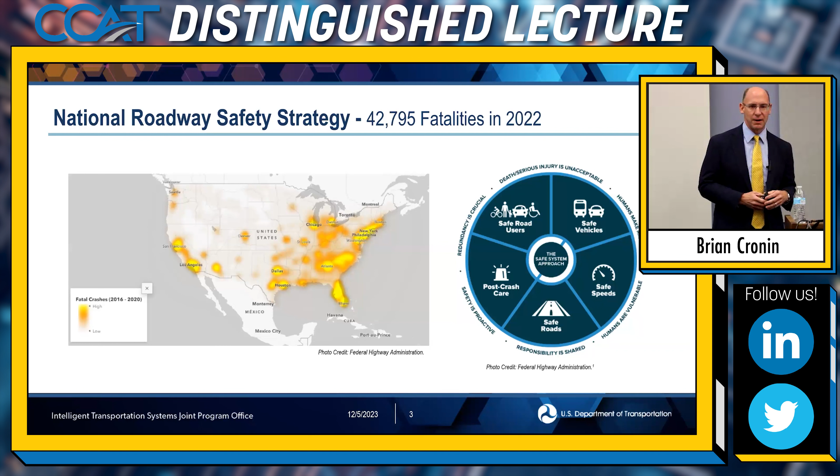So the other side in our strategic planning is innovation and transformation. It's in the department's plan. I pulled out a slide from Federal Highway's strategic plan, and it's really encouraging us to take risks and conduct innovative research and do it collaboratively, work with state and local tribal agencies, work with universities, work with industry to try to push the envelope and create something new. And so that's really what I've focused my career on: doing research leadership and trying something new. And I'm really happy to see in our strategic planning the focus on zero, but also the focus on creativity and innovation and how we go about doing that.

So when we're looking at safety, we have a wealth of data that we want to look at. And one of the things that has been alarming is the increase in vulnerable road user, pedestrian, bicyclist, people on scooters, fatalities. That's gone up 70% in the last several years. And there's been a lot of focus on how does technology, how does roadway design, what are the different approaches we can look at? And we've, as a department, also then looked at what are the situations that lead to it, what are certain states or localities that may have more challenges or opportunities. And so we've been diving into the data in different ways.

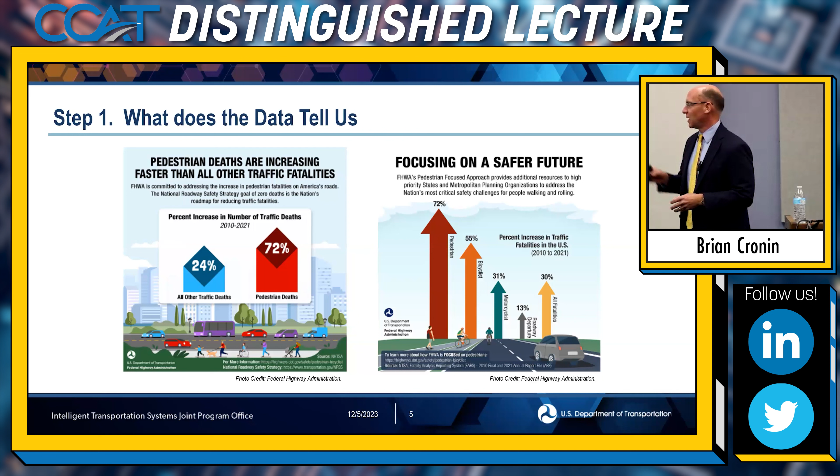And so now, as we think about how we look at that data, and I'll get to it more at the end with artificial intelligence and machine learning, but it's not just the fatality. We now can look at near misses, and we can look at other information, and I'll go through some examples that you wouldn't think about that could inform us in making better safety design choices that are now available to us.

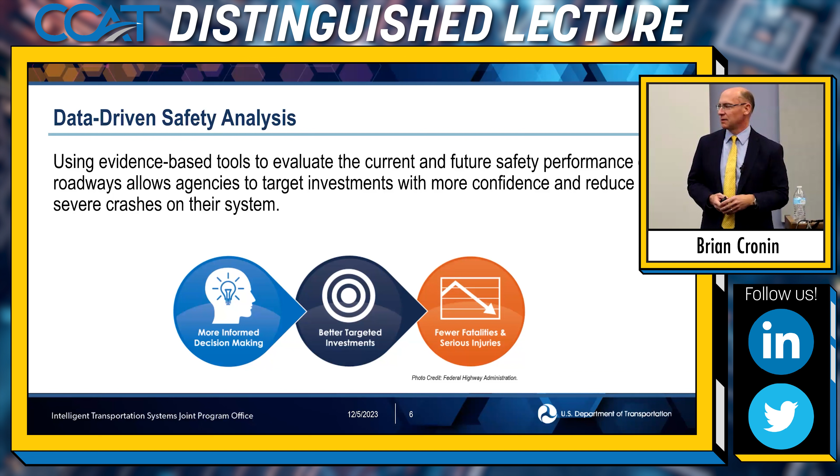So we really want to ask, do we have the tools as an industry to harness that different data? Do we have the access to those data sets? Is there open data? Is it shared? Do we have the space? Do we have the computing power? So we're looking into all of that. And how do we make an informed data-based decision?

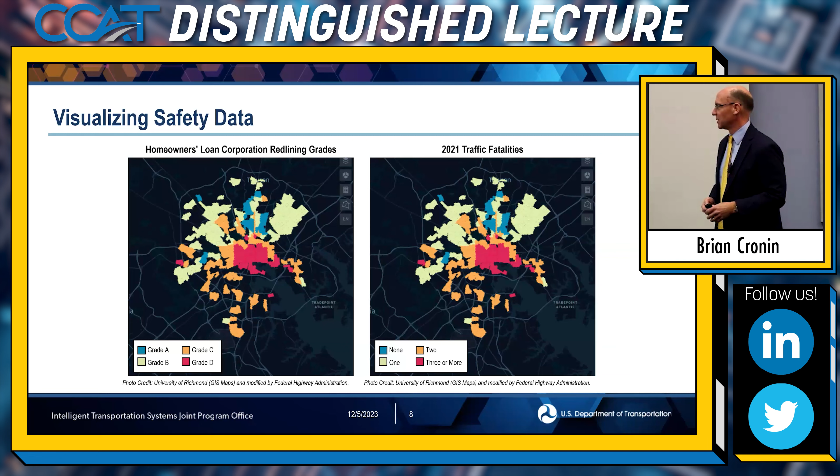So we end up looking at data, and we do our best to assess: what do we do? Where's the problem? What kind of solution might make sense? And then we have to go and design something bold and big and different to create that.

Two of our very successful designs, one longer term and one newer, are diverging diamond interchanges. The premise there is, if you can prevent left turn crossing path scenarios, and design these interchanges to take away that maneuver, you can reduce fatalities.

Federal Highway was working with the state of Missouri a long time ago, and our human factors lab was able to create the first diverging diamond virtually and run a human factors study to see if drivers doing something they've never done before, like crossing on the other side of the road where they might feel uncomfortable, could follow the signage accurately and know what they're supposed to do. So we were able to design in the virtual world a diverging diamond, build it, run tests through it, clarify the signing, and then the state went out and built the first diamond.

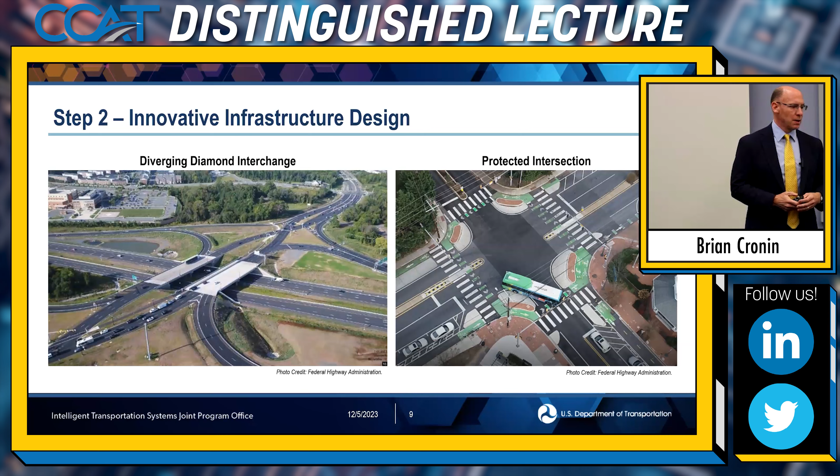If you think about our parks, we want them to be pretty, aesthetically pleasing, to look like they fit in. So you want a stone wall or a timber wall. Well, these were designed 50, 60, 70 years ago. Vehicles are bigger now - that low wall in your F-350, you're probably thinking you're going right over it. So what could we do to create this aesthetically pleasing wall, but not have the cost of a full stone wall? We designed concrete inside, and you're just facing the barrier on the outside.

We were able to work with the Park Service and our Federal Lands Office to create a new design and test it at Turner Fairbank. If you visited DC right now and drove on the GW Parkway, they're installing these new designs all across the parkway, soon to come across our national parks nationwide.

So it's just an interesting way to think about how Federal Highway might partner with the Park Service, thinking about how you keep something for the context that everybody wants. Our parks are beautiful, and we want to think about that and design accordingly.

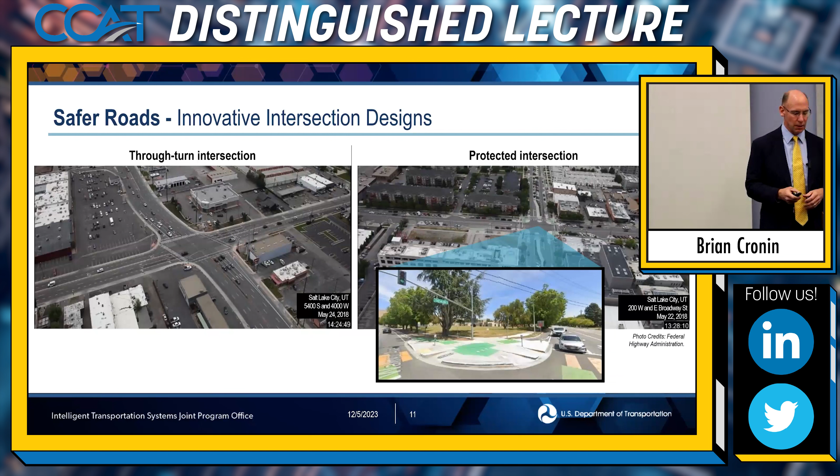Speed is another huge issue in the safe system approach. So we've updated our speed safety camera guidance. You'll see states looking at how you can put a speed camera in a work zone, so a lot of new capabilities. People are thinking about using technology, and what we're trying to convey is we're trying to get you to drive safely and drive at the posted speed limit. The speed limit's reduced because you're at a work zone or near a school or a different scenario, so we're thinking about driver behavior and speed setting, and how we want to enforce that.

We also have to think from an equitability perspective: who and how are we implementing this technology, and putting it in places that really are focused on safety, where they're speeding and where we don't want that speeding. In work zones, fatalities are going up substantially. In school zones, we do not want people speeding. So this is a technology tool that's available, and we've created some operational guidance on that.

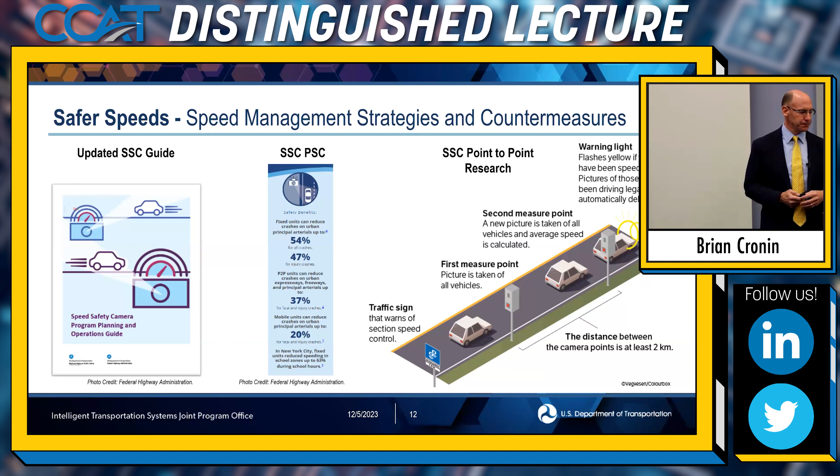So in this first part of the presentation, I really tried to just ground us on a lot more traditional speed setting, infrastructure design, and how traffic control devices go hand in hand with that. But now let's move back into sort of what you all are here about: connected and automated transportation. What does connectivity do to this situation, and what does automation do, and what are some of the opportunities?

Just last month, the department was here in Michigan, and we unveiled our draft national V2X deployment plan. So connectivity technology, looking at how we use the dedicated spectrum at 5.9 gigahertz for safety of life applications using cellular V2X. Also, how we look at other technologies that maybe don't need the high speed, low latency bandwidth of cellular V2X capable technologies.

And so we put out a draft plan, because industry asked us to, to really lay out a vision for the nation. In order for this technology to provide life-saving benefits, we need vehicles equipped and we need infrastructure equipped. The OEMs have asked, well, what is that vision? How many intersections, or is it going to be on our freeways, on major corridors? Where are you deploying this? And the infrastructure owner operators ask, well, when's the vehicle fleet going to get installed? So we've been bringing folks together to get input on that.

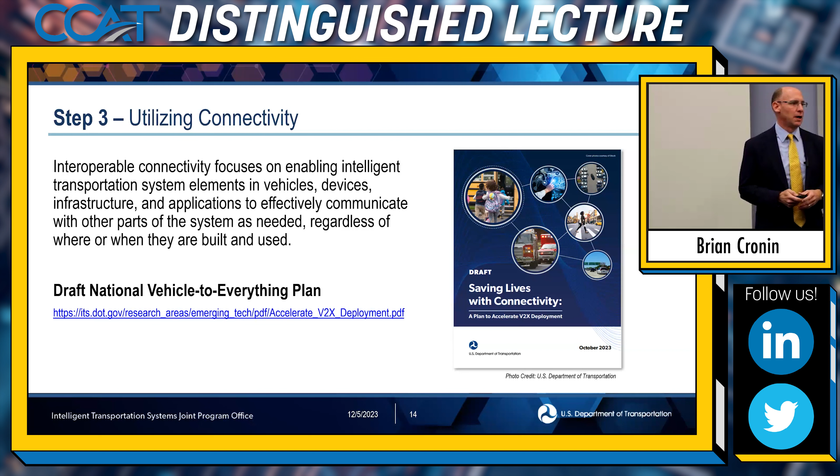And so I encourage folks, if you haven't yet gone and read the plan, we're asking for comments by the end of January, and the department's intent would be to create a new plan through the department in the March-April timeframe of 2024. But when we're talking about this innovation and collaboration, what has been the department's role?

When the FCC indicated we really needed to use cellular V2X, we brought our industry experts together - and we didn't go to Willow Run, we went to Willow Grove. It's an airfield down in Pennsylvania, and we recreated a scenario that the department had done with CAMP, with 200 vehicles, essentially creating and broadcasting messages using cellular V2X, in a scenario where you're approaching an intersection, to see would that vehicle get a warning for a red light violation type scenario.

And so we did a lot of this testing to make sure the technology was robust and ready, so we could help work with industry to move towards deployment. The department regularly collaborates with technology developers, the automotive sector, and IOOs to understand the current state of play. The FCC has been encouraging us to change technology types, and the whole industry was like, we've used DSRC, we know how that works. So we said, well, we can recreate that test and bring the parties together. We got equipment provided to us by major suppliers from the industry. It was their equipment, we set it up as if they were vehicles, and we were able to run these tests, and we've released the whole data set.

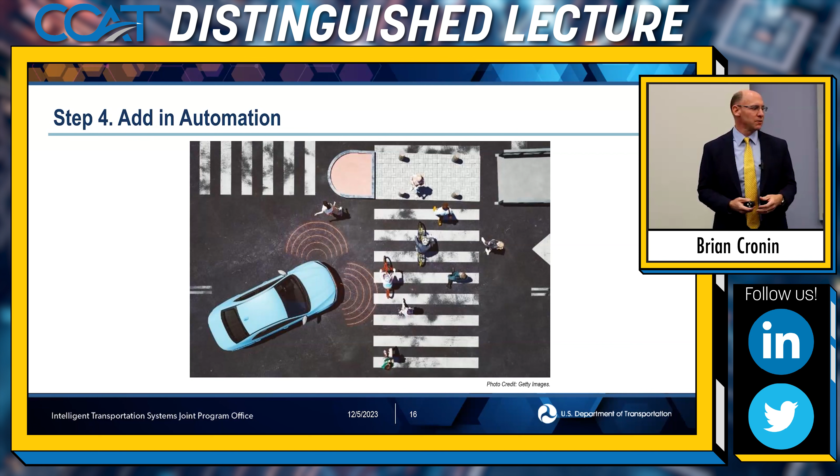But you can't talk today without talking about connectivity and automation. You can do automated vehicles on their own, you can do connectivity on their own, and you can do them together. So one of the things we've been doing in the department is looking at what we're calling cooperative driving automation. That is specifically trying to take the benefits of connectivity and automation, bringing them together to improve the safety, operations, and efficiency of the transportation system.

Federal Highway, the ITS Joint Program Office, Federal Motor Carrier Safety Administration, FTA, and the Maritime Administration have all been working collaboratively on various different use cases to think about how we can do that. And we're working with NHTSA to understand the safety implications and state of play of the automation sector, because we really are looking at how to enable a more efficient and safe system.

And from a Federal Highway and departmental perspective, we're looking at how do we enable this research, how do we foster an industry, how do we enable collaboration and innovation. And we chose to work a lot on this.

When we started this program 5-6 years ago, I couldn't go to an auto OEM and buy an automated car. And I still can't go buy a level 4 automated car. So we had to create one.

There was a company called Autonomous Stuff that built them using AutoWare. We chose to move to work in open source so we could more readily share results and think about how to innovate and create an ecosystem that might want to work together. I was happy to ride in the car here at University of Michigan just half an hour ago, and you also have AutoWare software enabling the fleet of vehicles you have. So there's a lot of opportunity to collaborate and innovate when you're thinking about open source.

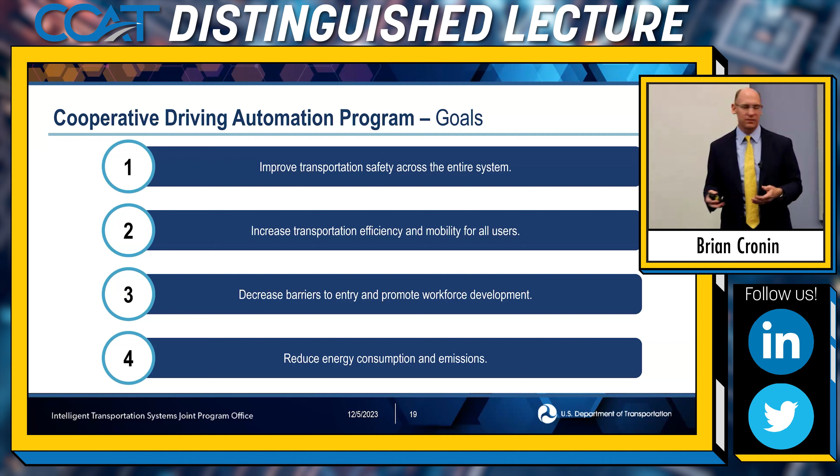So the next few slides, I'm going to go through and talk about the testing that Federal Highway did with our fleet of vehicles and trucks, along with motor carrier and MARAD. Over the last several years, we've done thousands of miles. Yes, it's not millions of miles like our AV companies have done, but we've done thousands of miles using different test facilities.

One of the first tests we were able to do was looking at high-speed freeway scenarios around work zones and merging, and we did that at ACM, the American Center for Mobility. It was great to be able to come up to Michigan and use that facility to do high-speed testing that we couldn't do at Turner Fairbank, and it allowed us to do various different testing.

We've done testing down at SunTrax in Florida with our truck fleet to leverage their test facility, and we've done some low-speed testing at Turner Fairbank, and then just recently we've used the virtual M-City and the digital twin of M-City to do testing that we just did a couple weeks ago with partners across the country. So it's really great that the community is stepping up with these test facilities, both in the real world and in the digital world, that we can leverage and enable different testing.

The telematics tool was developed to help understand, track, and analyze the information used in these technologies. This visualization of various data sets is useful for a multitude of research endeavors involving connected and automated vehicles because it allows developers to immediately view and understand the relationship between various points of data in time. It also provides an easy-to-use dashboard that presents data visually so users can monitor, plot, and analyze the behavior of entities.

So when we were doing a test to look at how an automated vehicle operates through a signalized intersection most efficiently, it's receiving signal phase and timing. We had 3 different vehicles approaching an intersection, and the question is, which vehicle's going first? We're trying to optimize for gas and emissions. So vehicles were receiving signal timing in real time and trying to figure out, do I speed up, do I slow down? And our researchers were trying to figure out, well, I need to understand what's going on.

They were trying to look at the data and figure it out, and we said, you need a tool. So we were able to visualize the red time, the green time, the yellow time, and look at the speed they were approaching. Then we could do different scenarios where these vehicles would launch at different times. You could purposely have them all approaching at the exact same time at the intersection and see what would happen, or have them approaching at different speeds at different times. It's a really interesting tool, available in open source, that helps visualize what's going on at an intersection. You're also getting the basic safety message, so you understand the speed of the vehicle, you understand the signal phasing timing, and you can see what's going on.

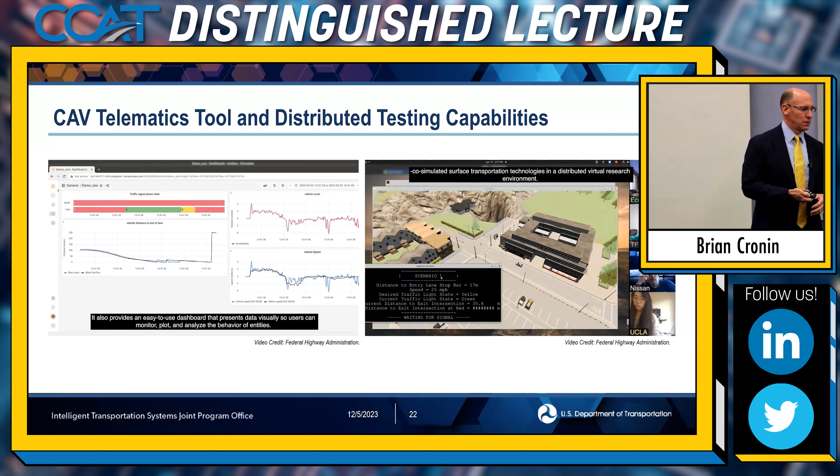So recently, in the spring, Omni Air held a Plug Fest down in Florida. This is where they bring companies, in particular those trying to build out the V2X infrastructure and onboard units, to test interoperability and implement what they did. We took our fleet of automated trucks and a roadside unit that was provided by one of the suppliers, and we created a scenario where we did it on our own first, with 2 trucks and a car approaching a work zone.

The message was for the car to move over 1 lane and the trucks to automatically move over 2 lanes, and for all of them to automatically slow down as they're approaching a work zone. So the scenario is, we want these vehicles getting away from the workers, we want everybody going slower. The infrastructure would send a message to the vehicle. So we did all that testing and development, running the use case on our own.

And then this Plug Fest happened shortly thereafter. Because of our open source development and the ability to have an ecosystem, within a week we could take a couple of these suppliers and have their equipment inserted into a test we had done on our own, and it worked just the same. So that was really exciting for us to look at the value of open source and innovation and how we collaborate differently.

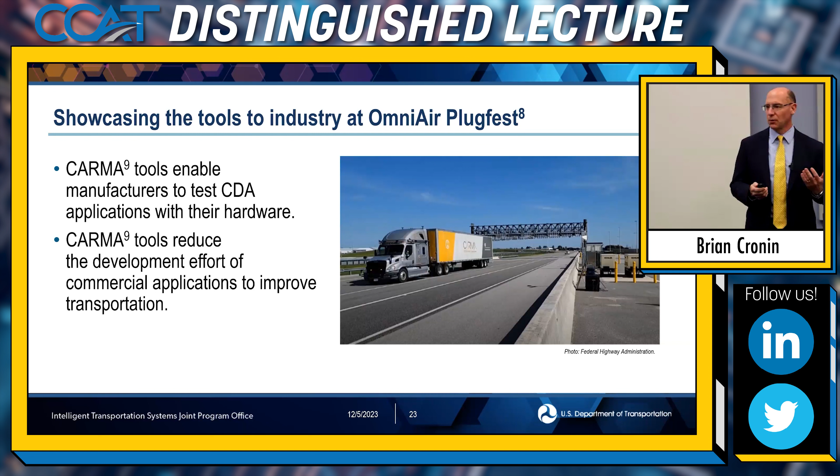Another scenario is in the spring, we're down at SunTrax, and this scenario is a 4-vehicle platoon. The first 3 vehicles are the Federal Highway CARMA fleet. The 4th vehicle is the University of South Florida. They had an automated vehicle, and they had used open source, so we kept our fleet down for a week. They came over on their own research funding, and were able to do testing and development with us, in which they joined the back of our platoon.

The situation was the vehicles were merging onto the highway, and we wanted the vehicle to come and join the back of the platoon. We're only able to do that because of the open source development we've been working on, and we've been sharing the research with the community, and the university had been following it. They downloaded and used a lot of the software, and we were able to collaboratively test in the real world. That was really exciting. We're really interested in trying to do more work related to that.

We're also very interested in the work zone scenario. As I mentioned earlier, fatalities are increasing in that area. So could you send a message that you're approaching a work zone, the speed limit is reduced, you need to change lanes? In this sort of scenario, think of it more on our arterial, where instead of having a flagger, which has one set of cars go through and then everybody stops and the other set goes through, what if you're just doing that automatically with virtual messages? We were able to implement that scenario, send messages, and have a vehicle automatically traverse the work zone.

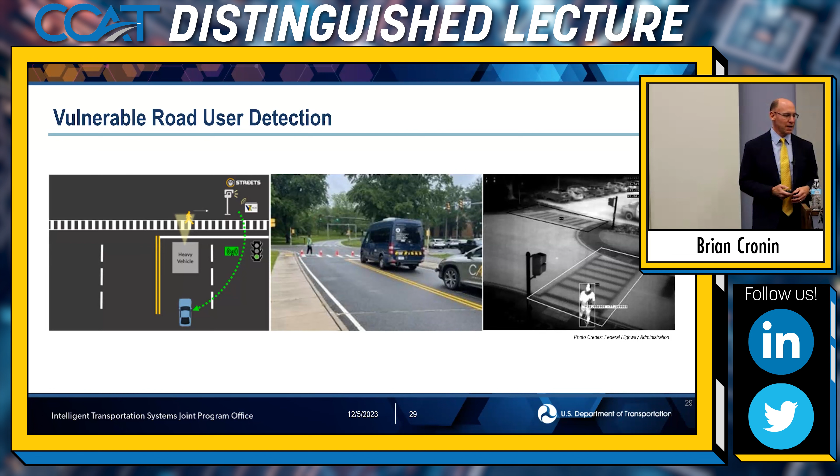I know you have the smart intersection work here in Ann Arbor looking at that. So that's a big area we're very interested in.

Artificial intelligence—we just had the presidential executive order related to that, looking at how we can safely advance artificial intelligence applications. I'll do a little shout out here to Peter Huang at Turner Fairbank. He's retiring this month. He championed AI in Federal Highway for traffic management center use for years, and he partnered up with Delaware DOT and Gene Donaldson, and they've implemented a lot of early uses of AI in traffic management.

There's now the Exploratory Advanced Research Program. We're doing AI and cameras to do incident detection better. Obviously, AI is at the heart of automated vehicles, and it's at the heart of our intersection safety challenge. I can't talk a lot about that today, but we're very excited.

We had 120 entities apply, 180 different partners as part of those entities, thinking about how you use technology at an intersection to better understand where the pedestrians are, where the vehicles are, and use AI and machine learning to generate messages to provide warnings as appropriate to improve intersection safety.

We have a whole lot of work in analysis, modeling, and simulation. I talked a little bit earlier about the virtual world, thinking about different tools to bring together testing safely in a virtual world before you put it in a test bed or before you put it in the real world. It also relates to our role in working with universities and educating.

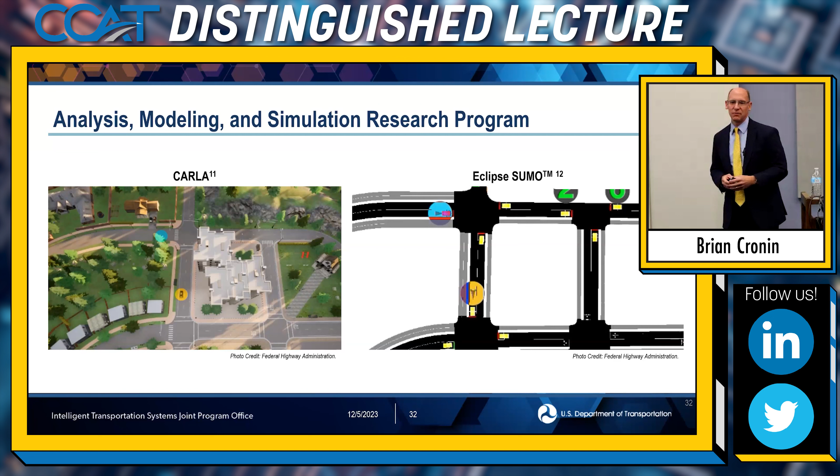There are universities that don't and can't afford to buy or build a $300,000 automated vehicle, but they have amazing simulation and modeling expertise, or they're experts in traffic, and they can engage, whether through algorithm development or simulation. So there are various opportunities there.

So the last couple of slides, I'm just going to bring everything together. We are very much focused right now on complete streets and really safety for all users. How does that street provide the mobility you need, the delivery of goods and services, but get everybody there safely? It's a design philosophy, and it's a technology approach.

I wanted to show a slide with an RSU situated on top, down at the bottom there. So if we think about a complete street of the future, I'd like to ask you to think about this: is it connected? Have we put in a roadside unit to share critical safety information about signal phase and timing to enable a wide array of different connected and automated services of the future?

And so I think that's why you guys are here, why you're the Center for Connected and Automated Transportation—to help the nation think about what the business cases are, how we bring this technology to deployment. I was happy to be here to share some of the thoughts on the research we do, but I think this is just a great opportunity right now.

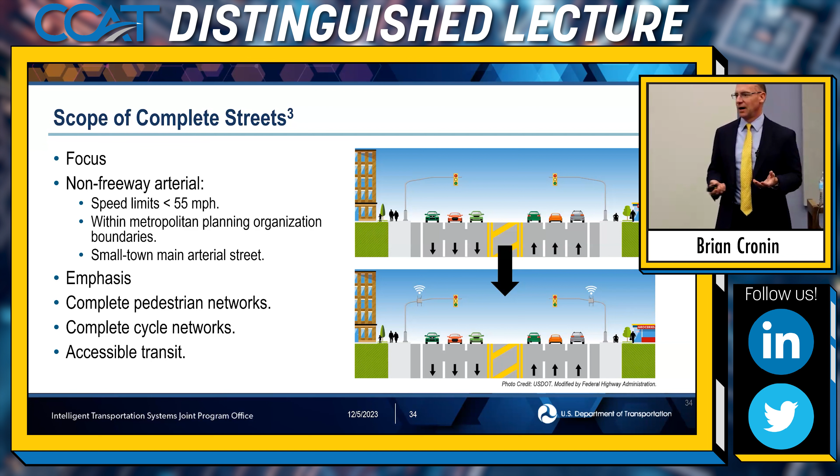So we see that a lot of connected vehicle work is being done under the auspices of the public sector in collaboration with the private sector. And all the autonomous vehicle work is almost being done solely in the private sector, with some public sector overlap. And as we move towards the common goal on both sides and kind of climb that pyramid, how do you see both of these working together, and what is US DOT's perspective on that?

Yeah, so just to ground this, I'll give you the research perspective, because that's where we are. I don't think the department is going to come out right now with a policy statement around deployment. So just couch that as the answer. I'm coming to you from someone who's in research, right?

And so a lot of what I talk to you about is, we've been trying to say, is it feasible? What are the standards? What are the messages? What are the hurdles that we would need to overcome to bring this technology together? And so for the last 5 or 6 years, we've been in the early stage, and we've been working with SAE. There's a Cooperative Driving Automation suite of standards under development. And that's a key first piece in sort of a federal role.